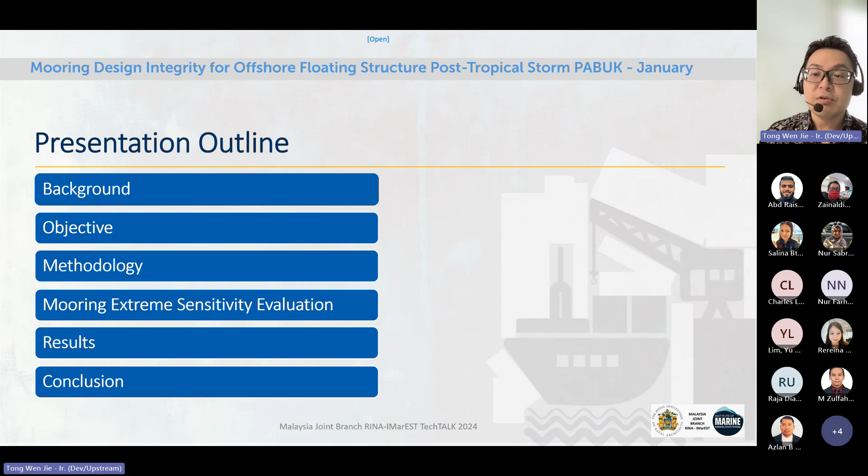On the background, this tropical storm started or maybe happened on the first day of January in the year 2019. This tropical storm, identified as PABUK, was developed in the South China Sea.

It developed in the South China Sea and passed through Peninsular Malaysia before crossing to southern Thailand, then dissipated in the Andaman Sea. PABUK is a rare case where it started as a tropical depression within Malaysian waters and then intensified into a tropical storm in a very short period of time. During this journey, the PABUK path crossed a number of offshore facilities, both fixed and floating assets, while its relatively weaker tail crossed through some of the other assets as well.

The chronological event: on the 31st of December, the tropical storm depression formed in the middle of the South China Sea, then strengthened with differences in pressure and intensified with wind velocity, and tropical storm PABUK formed. It traversed from the Philippines towards the South China Sea and then towards southern Thailand.

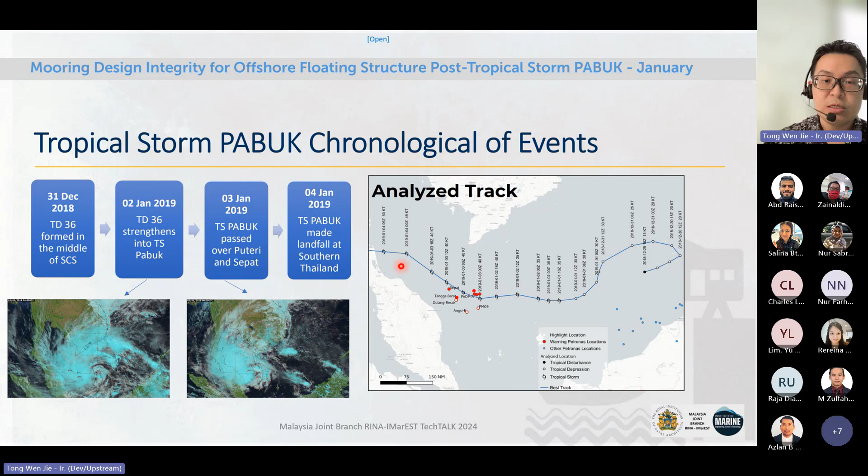This tropical storm PABUK, as it weakens, is estimated at about a 400-year return period extreme event at our locations. This means that at Peninsular Malaysia's offshore, the recorded maximum wave height exceeds all previous recorded measurements. For example, at Bekok offshore the Hmax was 7.7 meters, Dulang 10.5 meters, and Resak 9.2 meters. All of these way exceeded the previous recorded wave measurements.

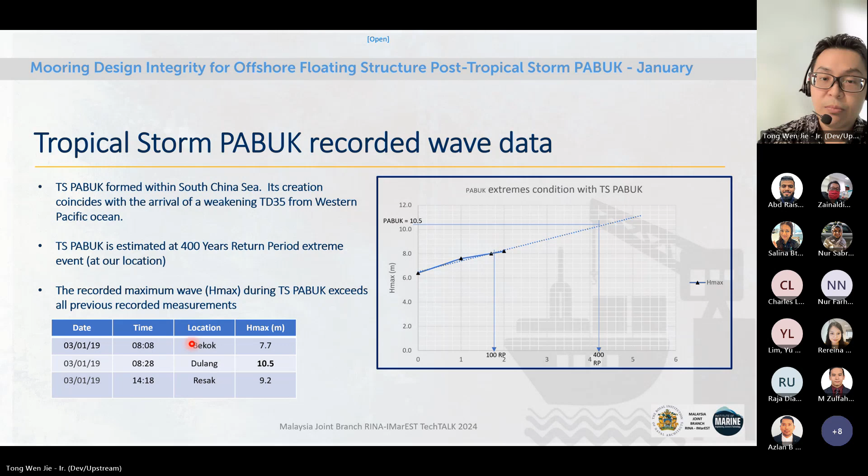Here it shows the visual observation of the wave height in relation to the deck level of the floater. These photos are taken from the floaters at this point, showing a wave approaching the platforms, and then as it leaves it almost touches and reaches the deck level, at about 1.2 meters difference between the deck level and the highest wave crest. That shows how great the wave was at that point in time.

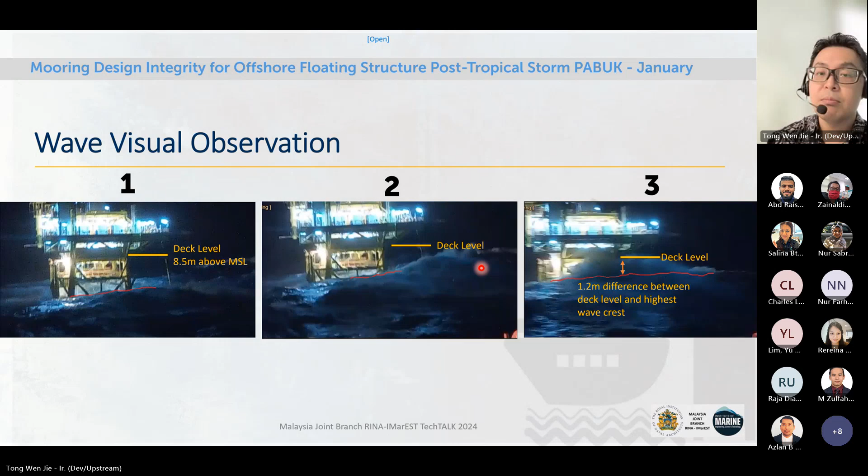So the objective of this study is to perform the storm situation assessment on the affected floater during the passing of tropical storm PABUK. Next, we will do the sensitivity evaluation on the mooring station keeping through this analysis on the storm criteria for the floater, by establishing the threshold limits.

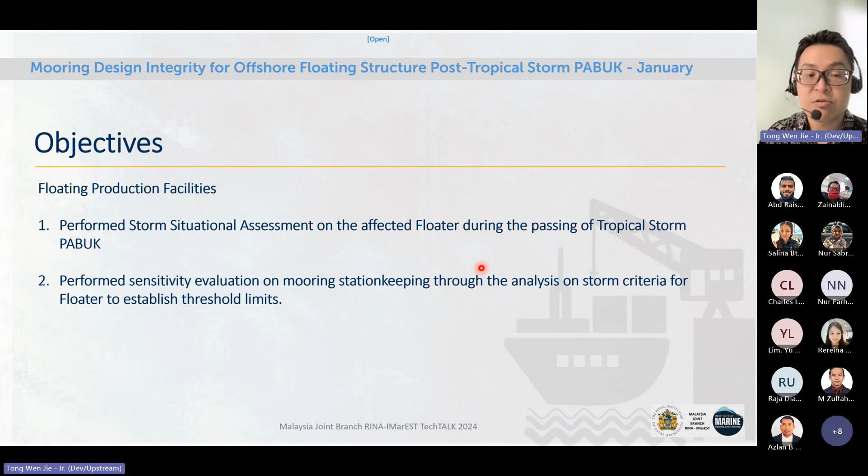On the storm impact, what do we normally do when storms impact floaters, and how does it impact it? When a storm happens, we would like to avoid green water loads hitting and putting pressure on the floaters. The consequence is, if the load is too great, the mooring lines will be parted or snapped, considered broken or lost.

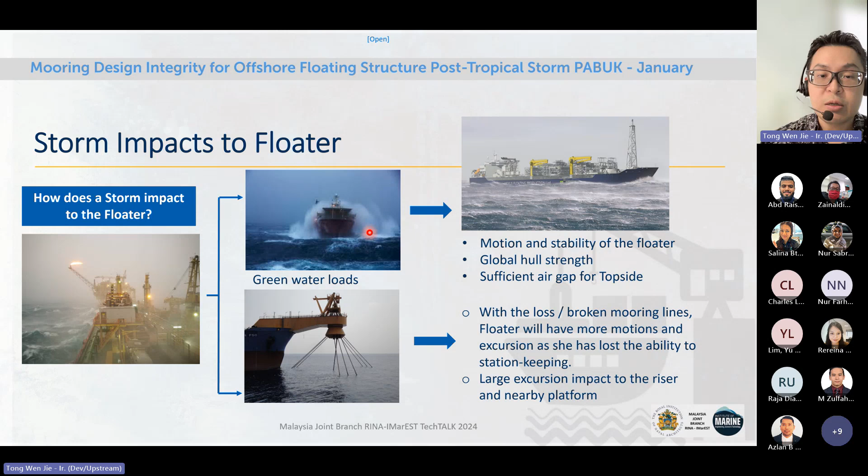Because if there's a green water load hitting on the deck, then it will affect the motion and the stability of the floater, and with the result of wave slamming on the hull, it will also affect the global hull strength. And then lastly, the topside.

If there's no sufficient air gap between the deck and the wave, with green water hitting the floater, it will damage all the topside processing facilities.

Whereas on the mooring lines, with the floater having a loss of broken mooring lines, we will consider it a damage case condition. The floater will have more motions, and she will have a loss of ability to maintain her station keeping. It will also have a large excursion impact to the riser, and if the floater position is too close to the platform, there will probably be lesser clearance between the floater and the platform.

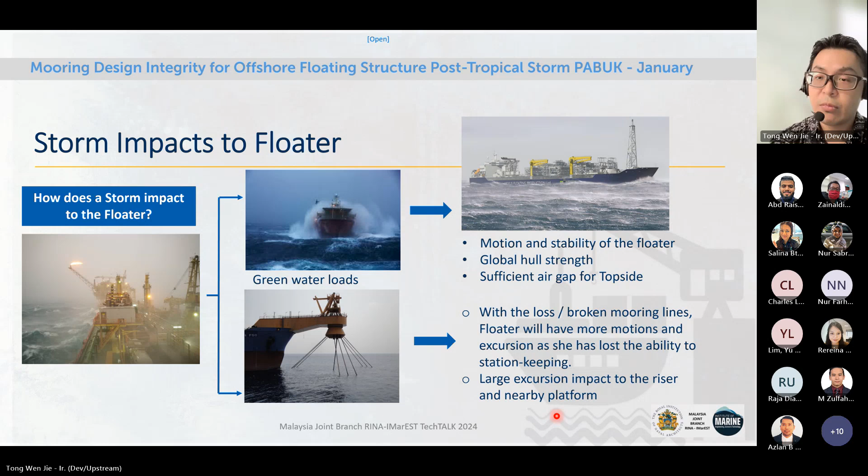So normally in engineering practice, the floater will always be designed with a combination of ocean criteria for a 100-year extreme return period, for first stability, for cases like stability in the intact case, and then the damage case with one compartment tank flooding. And then global hull longitudinal strength will consider still water, bending moment, and shear force.

On the mooring station keeping, it will be analyzed with the intact case and then the damage case with one line failure. In some projects, if the area or location has much more adverse weather conditions, they will also probably look into a second line most loaded.

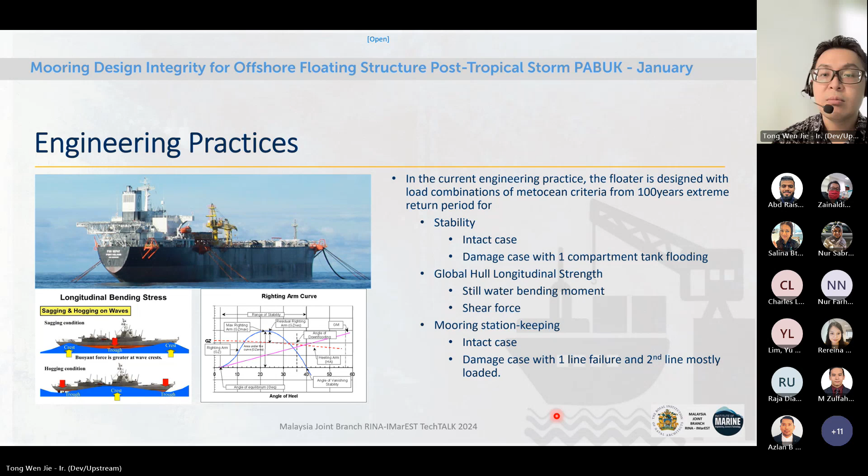So the applicable codes and standards for the storm - there are various codes and standards that can be applied, such as API RP2SK, American Petroleum Institute, for the recommended practice of station keeping, titled Design and Analysis of Station Keeping Systems for Floating Structures. Also API RP2FPS, ISO, and for example the class rules, like ABS, DNV, with various standards of technical criteria that can be looked at.

For example, API RP2SK gives tension limits and safety factors for intact and damaged cases. API RP2FPS prescribes abnormal or accidental limit states for a 10,000-year return period, especially for floaters deployed in cyclonic or hurricane-prone locations such as the Gulf of Mexico. The ISO code standard has available storm criteria assessment with a safety factor of 1. And the ABS class rules cover extreme events for 100, 10, and 1-year return periods, for various kinds of applications.

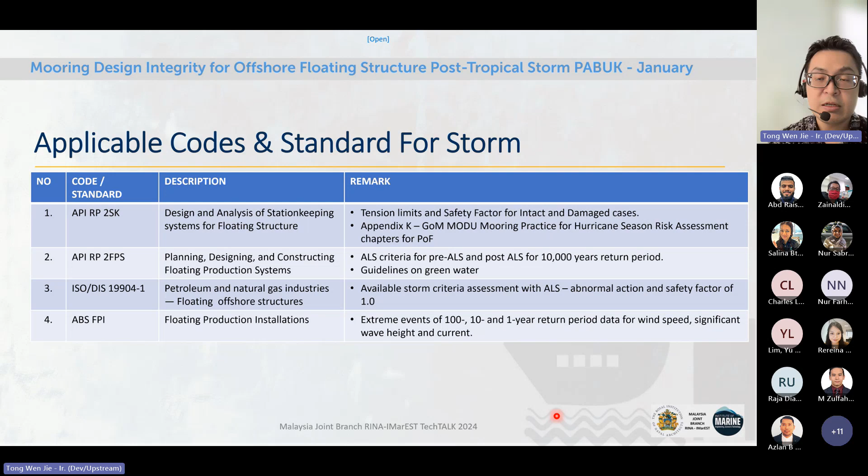Here is the storm assessment for the floater. We did a situational assessment, and during that point of time, we only picked the one that is essential to advise on the best way forward for the floater during the passing of this tropical storm. So we assess a few.

There are areas that we consider, such as the mooring station keeping on the intact case, green water effect, freeboard, air gap, mooring station keeping damage case with one line failure, and also second line mostly loaded, structural reliability assessment, stability, and etc. So we identify what criteria we can establish.

Currently, in-service floaters in Malaysian waters are also proposed on this accidental limit state between 100 to 1,000 years. When we simulate, we also iterate with some sensitivity load cases. For the green water effect, we will evaluate sufficient air gap on the topside due to this rolling effect and excursion movement. And for the mooring damage case, this case when we run...

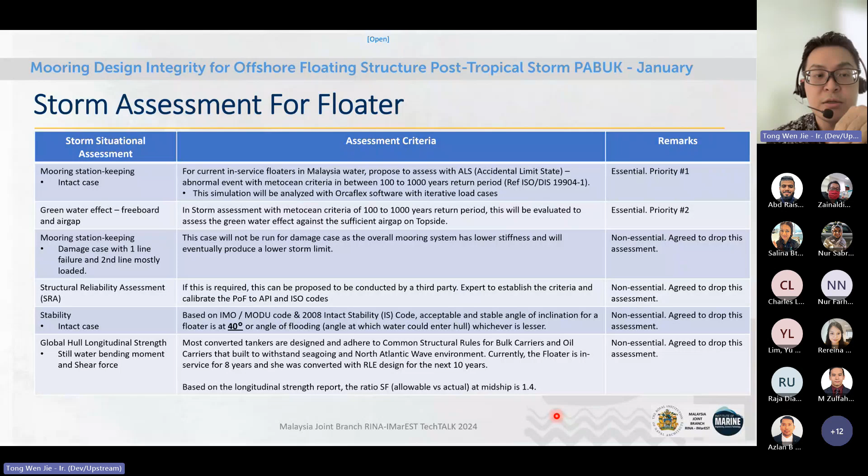So the floater design environmental model is done using OrcaFlex. It will be modeled, and then the wave directions as per the diagram will be collinear with the wind and current with respect to the wave directionality of 45 degrees.

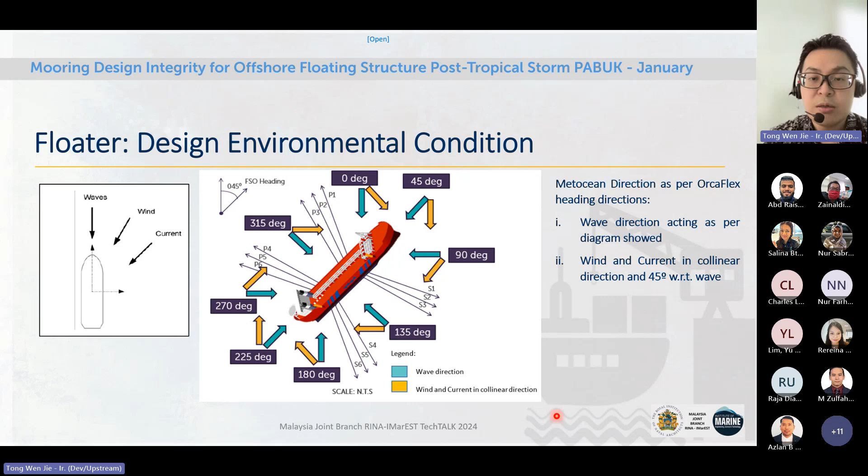So the motion data pre and post PABUK. This is the actual measurement taken from the nearby field, and the recorded Hmax around 9. Previously the highest measurement taken was about 10.5, and the corresponding HS should be around 6 to 6.5 to 7 significant wave height.

And this is the original measurement data that we used during the design engineering phase, which we adopted, with the HS of 4.7 at the 100-year return period.

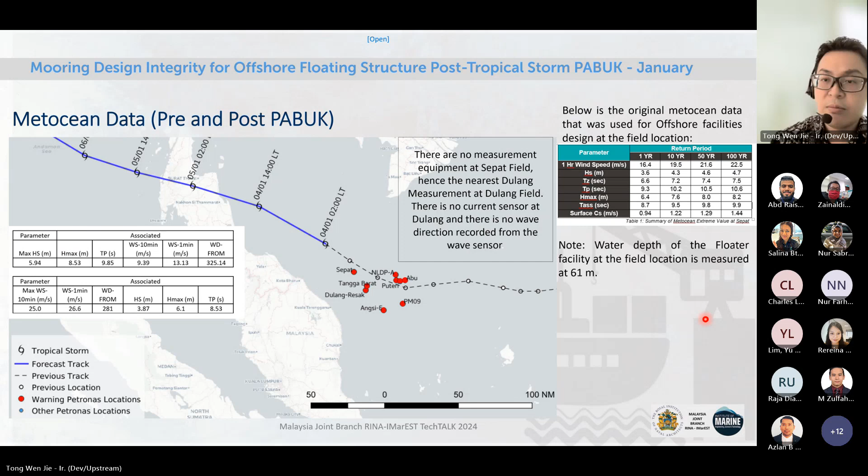So we look back at the previous design data to collect all the essential parameters of the mooring specification. We need to know the diameter of the chain, which is around 105. The type will be the studless chain, grade R4 and R3.

Referring to notes 2 and 3, we will use the lower bound of the minimum breaking load after 10 years of wastage due to corrosion allowance, because the floater has been in operation. We will also take the most stringent criteria by taking into account the wastage with corrosion, perceiving that corrosion has taken place in some of the chain. So we will take the minimum strength of this R3 chain.

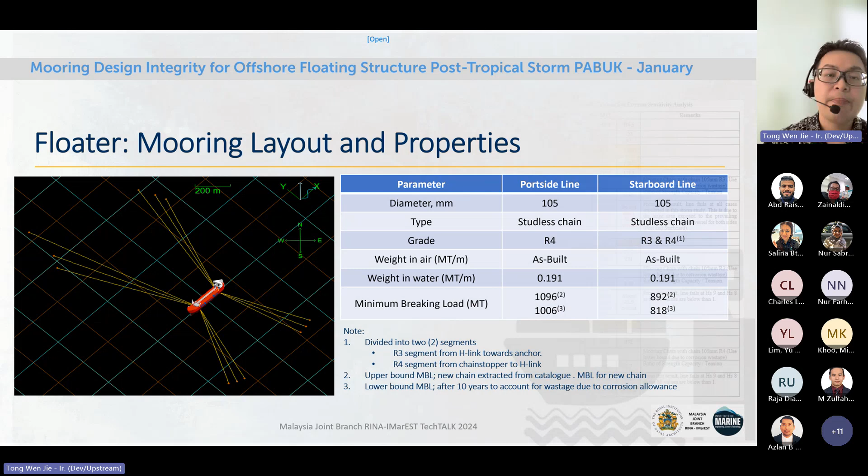Post analysis, there are 3 areas. First is at the beam, the true beam with the wave that from HS of 9 meters until significant height of 5 meters, it does not pass even the accidental limit state with a safety factor of 1.

So with that, we disregard this because this is due to the large area of the prevailing directions, and we can omit it because of the low chances of true beam, given the spread mooring configuration with station keeping according to the prevailing directionality. True beam, we anticipate, may always be the worst case scenario for such station keeping. Hence we go to the next one with the directionality.

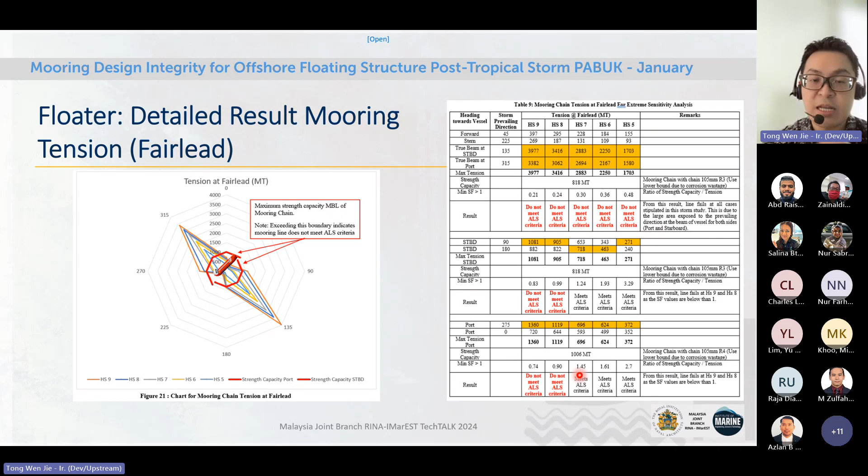So the floater can withstand until HS of 7 meters after utilizing all the safety margin of the mooring line. This means that the mooring chain is being stretched to the limit before it snaps. So it can only withstand until HS of 7 meters.

In terms of rolling motions, we also check. At all cases, it's still within the stability criteria for rolling. The maximum roll is at 33 degrees. So it's still stable because it's being held down by the mooring lines.

So the rolling effect is not as much compared to a floater that is free from mooring lines. So it will definitely meet the stability criteria for this.

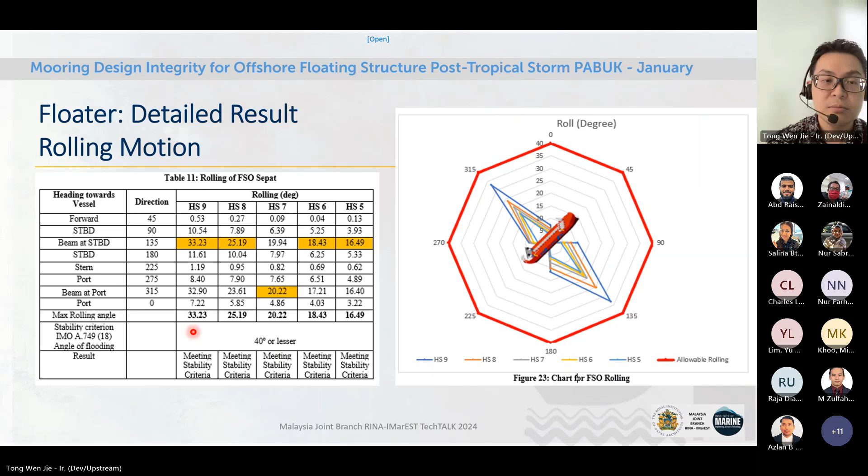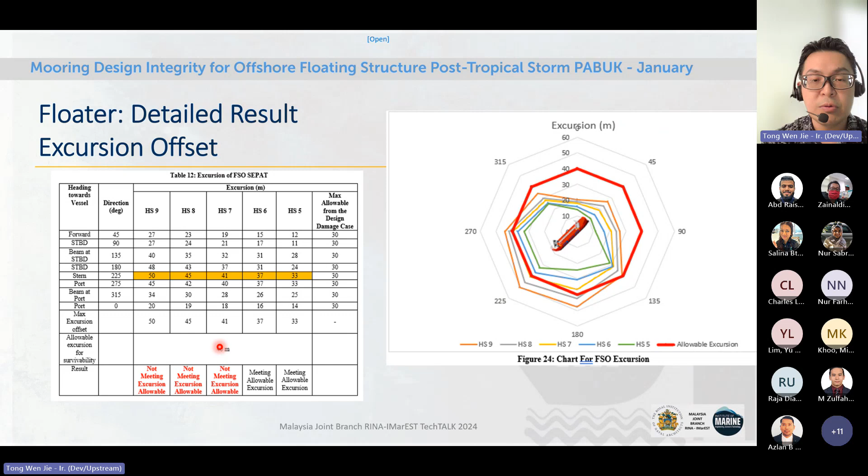So there will be a traffic light system for the floaters, decision to be made when needed. From past analysis, we put the HS at 6 meter significant wave height, so the floater will remain on high alert during the operation. This is only applicable for wave directionality, not the true beam.

The design case we established, by referring to the design book, is about 4.7, we make it 5 meters. At amber to red will be 8 meters, and red alert will be 9. So we anticipate multiple scenarios of multiple lines of failure for that.

So in conclusion, the revised metocean criteria of Hmax was established based on the actual measured data obtained during the tropical storm PABUK. The data was found to be 6% to 14% higher than the previous metocean criteria. As such, we carried out this sensitivity check to ensure the mooring strength is sufficient and within the threshold limit for both anchors and the fairlead. We also provide necessary precaution and mitigation should the extreme condition approach the amber and red criteria.

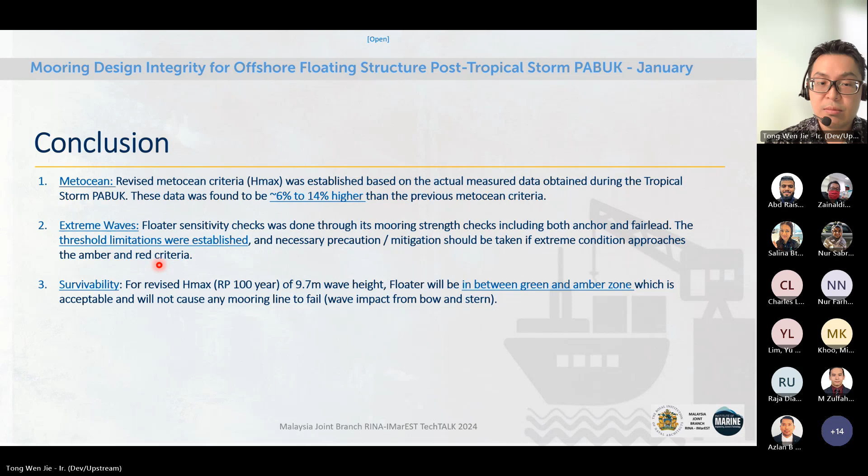This will be reaching my last slide. That will be all, thank you so much. I'd like to open my presentation to the floor for questions and answers.

Hi, yeah, I just wanted to ask, what was the main objective of the study on mooring design integrity for PABUK? Oh, hi Sabrina, thank you for your question.

The main objective was to evaluate the mooring design integrity and also to establish the threshold limit, as I presented, for this operational floater unit experiencing significant force during the storm. So the assessment was done to check whether there's sufficient strength before the mooring line started to part, and also to establish what will be the mitigation should that happen.

So that's why we established the traffic light for the various wave categories, so the operation team can stay alert, and action can be taken by the operation team. I see.

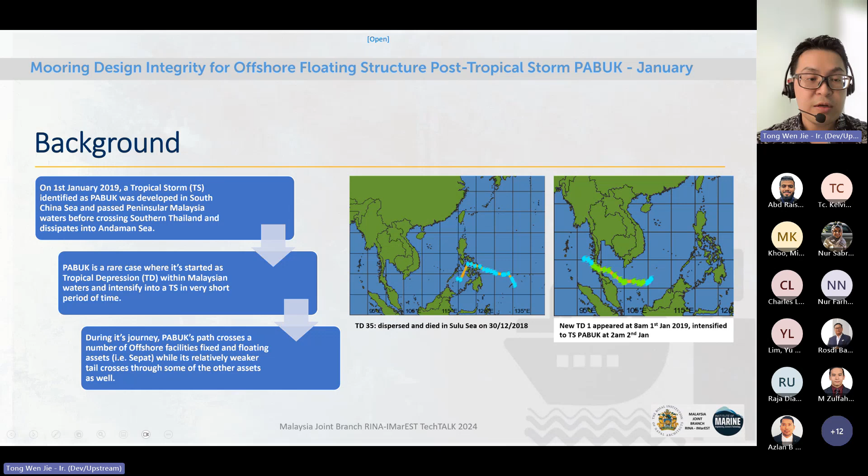On the second question, on how do we react when HS is 7, 8, or 9 -- so on 8, we're probably expecting one line will fail at the anchors, maybe exceeding the anchor holding capacity as well.

So operationally, when there's a notification of a tropical storm building up in the area, there will probably be an emergency alert for non-essential mariners to abandon the floaters -- more like an evacuation. The essential marine teams staying on board with the captain will take charge of command, looking at the situation at that point in time. That will be one.

And then let's say the flow lines had to be shut in to stop production from the producing platform, so that we can safeguard all these and prevent the escalation. I think that's a few things we can have on the operational mitigation plans for each category.

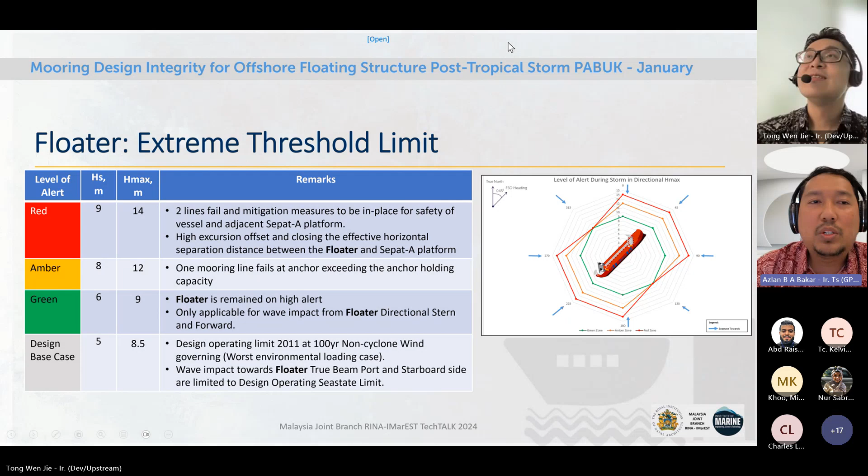Thank you so much, guys. Thank you. Thank you.

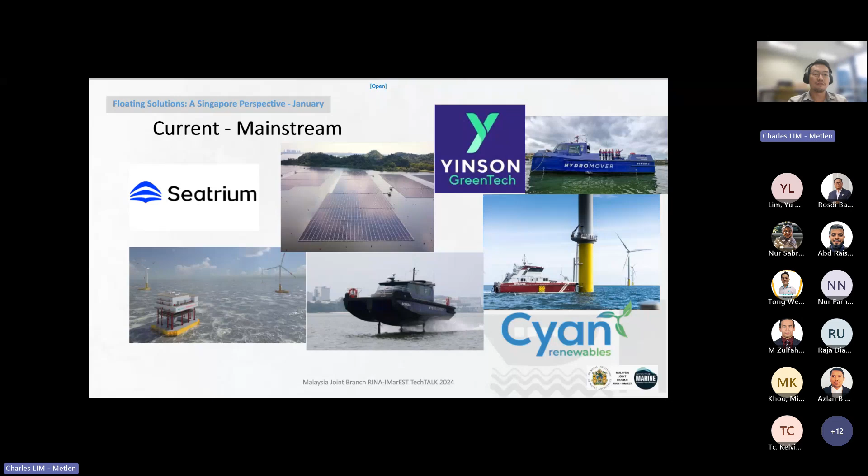Often people say Singapore's biggest problem is there's no water, right? But that's not right, because now with desalination plants, you have water. And when people say Singapore has no power - but that you can easily import, either through transmission lines or through the importation of fuel, and that power is being generated in country.

To me, the biggest problem is land. Singapore has been reclaiming land for as long as I can recall, and now Singapore is on the UN list, or rather blacklisted for sand importation. So I believe one of the most probable solutions to solve Singapore's land problem is to adopt floating structures.

Imagine this - built-up space in Singapore typically costs between 400 to 3,000 Singapore dollars per square foot, as compared to Malaysia, where I think in Bukit Bintang or KLCC area, the most expensive condo would probably only cost around 3,000 ringgit per square foot. To compare it with the cost of a floating structure, that's around 300 Singapore dollars per square foot - so it makes total economic sense to consider floating structures as compared to reclaiming land and building on top.

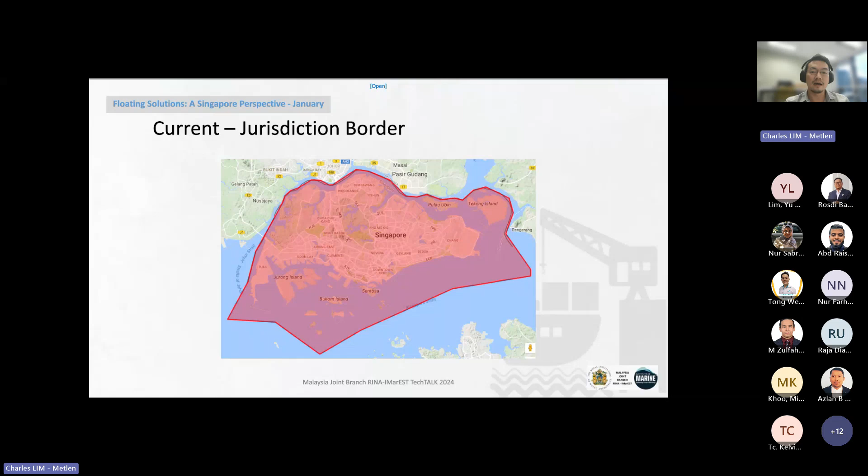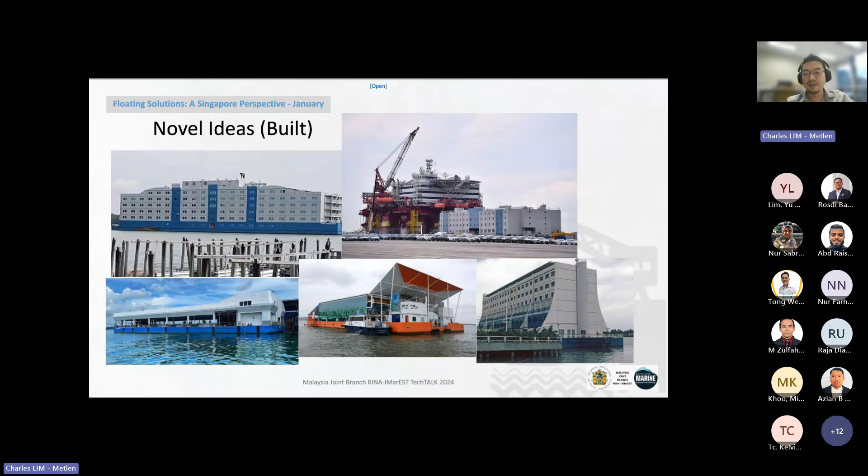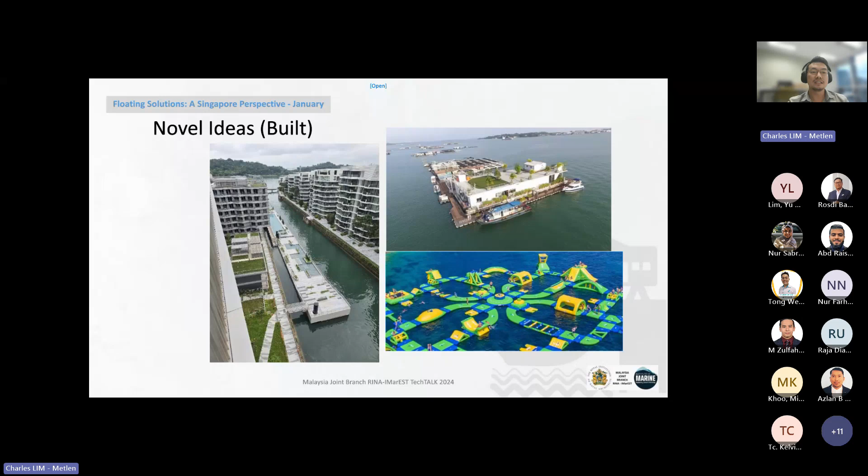By integrating power, you could actually valorize waste cold energy or heat into productive power. That will help increase efficiency, prevent losses, and if you're familiar with RECs - renewable energy certificates - or even carbon credits, this particular project will actually allow you to generate energy efficiency certificates. Currently it's not a thing in Singapore or even Malaysia, I believe, but this project would probably push the government to look at it as a possibility.

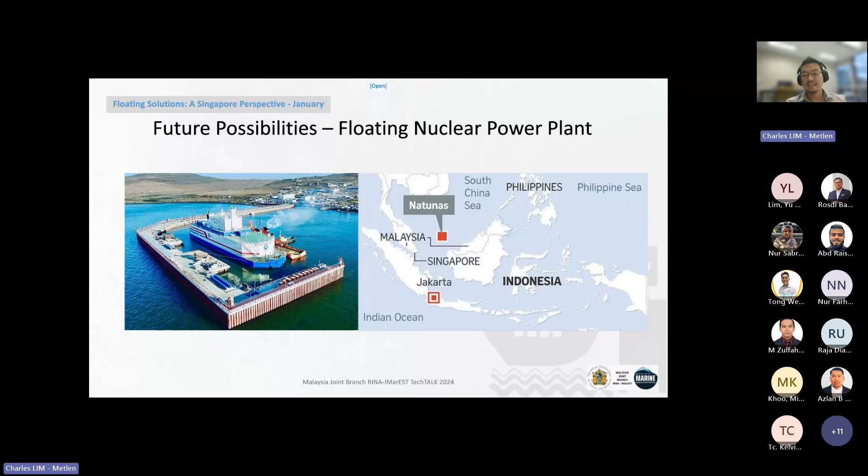To them, this would help solve Singapore's problem. But what they did not know is that the structure would require a 100 to 200-meter draft, which Singapore does not have. Singapore has shallow water, at most 20 or 30 meters along the shipping lines, if I'm not wrong.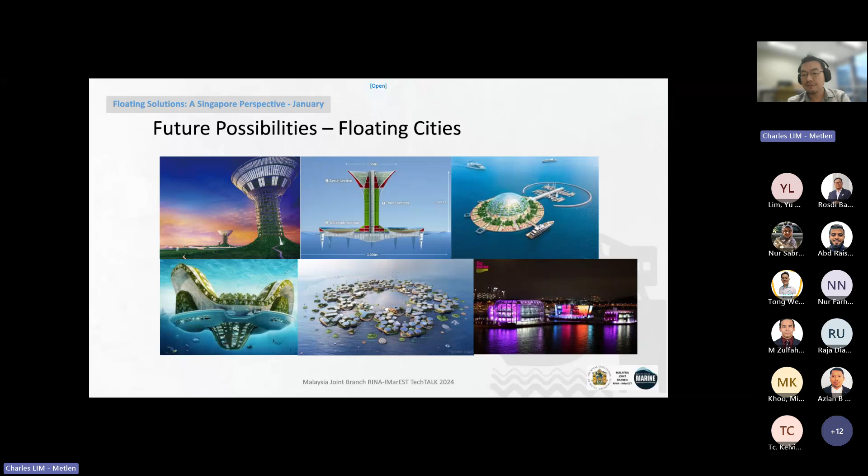Mindful of time, I'll move a little faster. On the materials side, I think a lot of us here are familiar with steel being the main material for either vessels or oil rigs, but the society would like to also promote concrete as a floating material for structures instead of steel.

It is more durable, more economical in the long run. Although it's heavier, it offers better stability and better weather resistance with a longer design life. And unlike steel-based structures, class would require less periodic inspection.

For a vessel, typically you have 30 years, then maybe you can do a bit of extension, another 20 years, with 5-year inspections in between, sometimes biannually. Whereas concrete, you can just leave it there for 100 years and it'll still be there, no problem.

A lot of people like to ask, can concrete float? Yes, the answer is yes. It all depends on Archimedes' principle, right? Buoyancy.

Concrete being heavy works best as the base foundation or the hull. It lowers the center, while the top side or superstructure can be made with lighter materials.

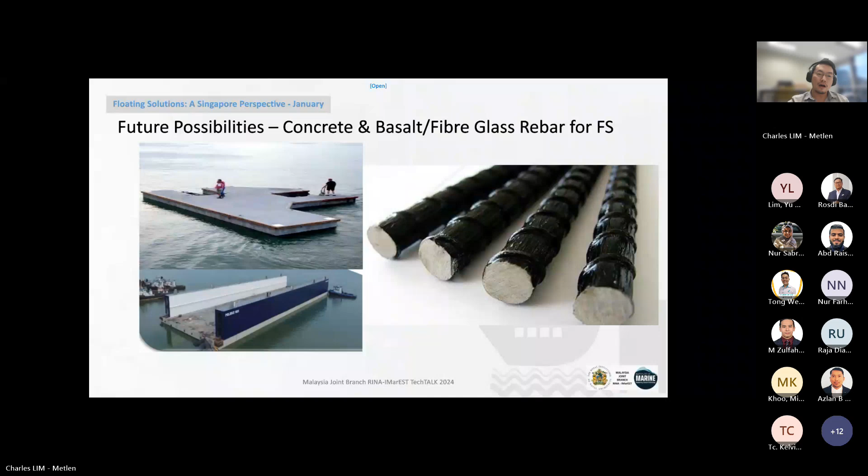I think the key to adopting floating solutions is probably to do it with sound engineering and scientific approach, not just the design but the fabrication and installation as well, just like how we approach getting a ship or building built.

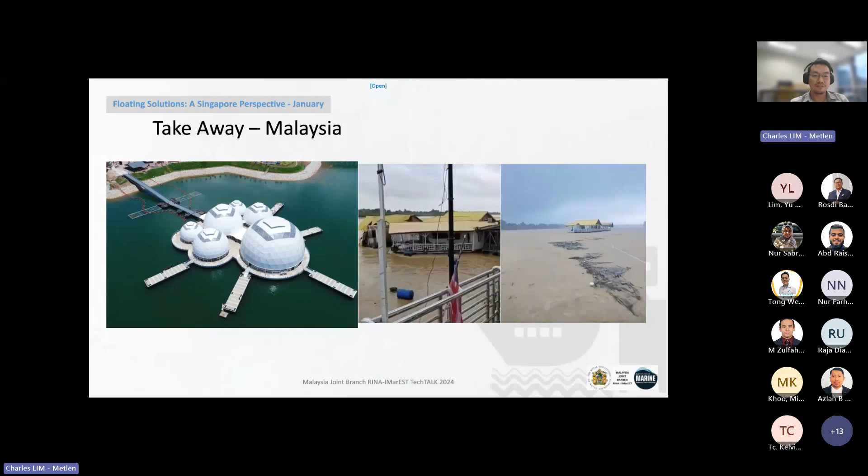Is there a future for floating solutions for Malaysia? I would say yes, but probably it would initially start towards functional infrastructure, like power plants, ports, infrastructure of those kind. And when the price of real estate hits parity compared to fabrication cost of floating structures, then you'll see more novel solutions. I believe Penang and Malacca would stand to benefit from that. On that note, I probably would end my sharing for now and move into Q&A.

Hi, Mr. Charles, Sabrina here. Just a quick question in terms of what are some of the challenges that can come about adopting this floating solution?

At the moment there is no clear or mature regulatory framework to allow such floating solutions. If we are referring to the oil and gas industry, yes, but if we are talking about novel floating solutions, no. Without proper knowledge of the risk, you won't be able to insure such projects, and without insurance it becomes not bankable. So not being able to get financing is a big issue for any project. And often floating structures are deemed as a depreciating asset, imagine if you buy a house and the price of the house goes down, that's not something you want.

I think the key is probably to have a change in people's mindset. We are used to living on land. The Dutch have been living on water for a long time, but that's only them. With a change in mindset, that would help probably solve a lot of the challenges that we see.